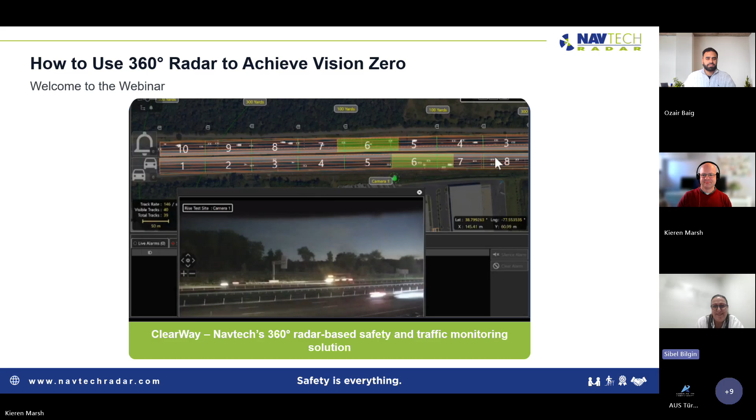Hello everyone, and welcome to a webinar about Navtech's 360-degree radar-based incident detection and traffic monitoring system. Talking to you today is myself, Ozair Baig. I'm a sales engineer at Navtech, responsible for all ITS-related business in Turkey. And with me I have Kieren Marsh, who is Navtech's ITS product manager, who also brings a rich history of technical delivery experience with him, and who will guide you through some of the technical fundamentals of the system.

We hope you will then leave this webinar today with a better understanding of what makes ClearWay a high-performing and versatile system. A bit of background for context about Navtech.

Navtech have been in business since 1999, so for around 25 years. This has allowed us to build our product expertise and experience when it comes to deploying and designing radar safety systems. We have our own purpose-built manufacturing site, enabling us to keep all developmental and design aspects of our system in-house. We were a founder-led family business for 20 years, and at the end of 2018, we joined with Halma, who are a large UK PLC listed on the UK stock market. Halma is a group of engineering companies that work to provide cleaner, healthier, and safer work environments, and Navtech are part of their safety division, contributing to this mission through our advanced radar safety technology.

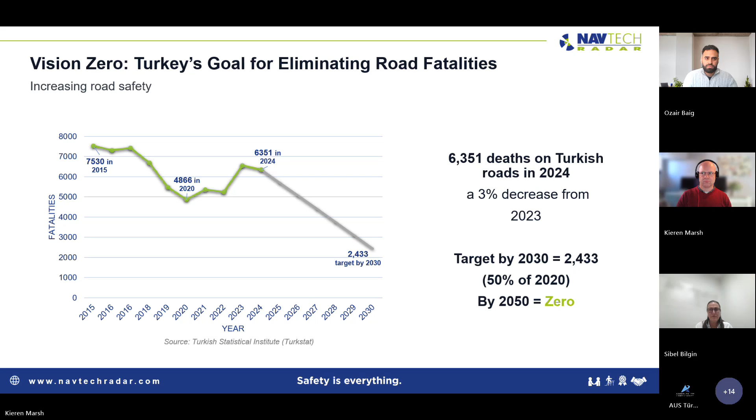Navtech's ITS solution ClearWay combines 360-degree radar technology with advanced rules-based software to deliver powerful and precise monitoring and detection capabilities. It is used by highway agencies, departments of transport, tunnel operators, toll and concession owners to operate their roads, tunnels, and bridges more safely and efficiently.

The 360-degree radar-based AID system detects incidents within seconds, enabling operators to respond swiftly, keeping traffic flowing whilst enhancing safety. It detects along long stretches of highways in poor visibility and adverse weather conditions, improving safety when it's needed most, in conditions where accidents are more likely to happen.

When you need your detection system the most is often when conditions are far from perfect. It may even be that the conditions had a part to play in any incident itself.

Navtech radars will continue to detect with the same level of performance in fog, snow, rain, smoke, complete darkness, and in bright light and glare. In these situations, being able to reliably detect becomes even more critical to ensure other road users are alerted and diverted appropriately.

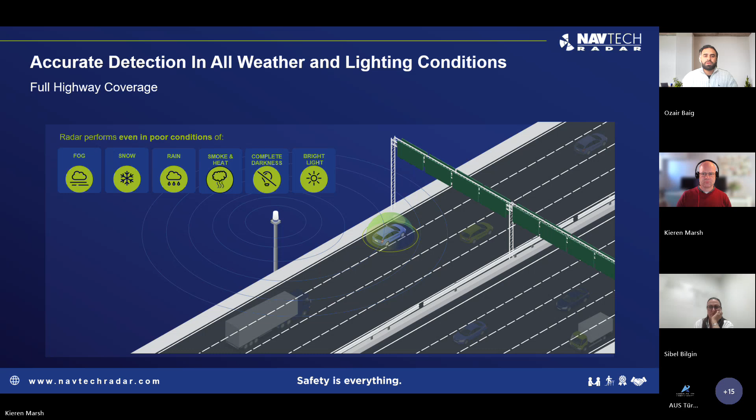Incident detection in tunnels can be challenging. ClearWay is a proven incident detection solution in tunnels across the world. The 360-degree radars monitor for incidents across your entire tunnel, including at portals and approaches. This is where vision-based technologies can struggle due to the high contrast lighting and variable weather conditions. Automatic camera control adds visual context to alerts, assisting operators to respond appropriately.

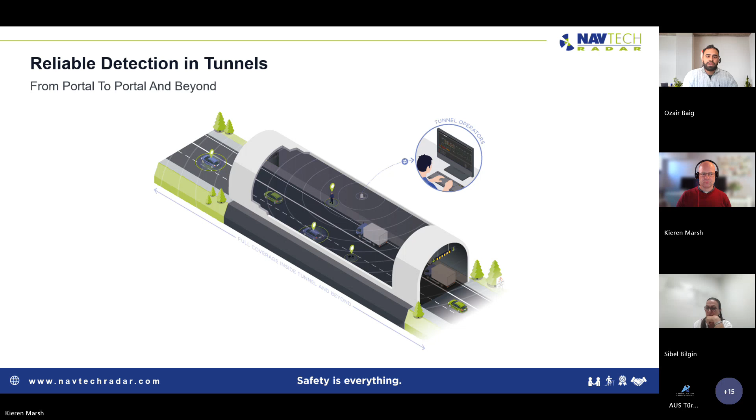ClearWay provides comprehensive safety features by being able to detect the most serious incidents. These are stopped vehicles, wrong way or ghost drivers, obstruction detection such as dropped loads or rockfall, hard shoulder monitoring, queue detection, vulnerable road users such as unauthorized pedestrians on the road, and wildlife detection to monitor for animals that may cause serious collisions. From the same radar instrument and software, traffic statistics for the monitored road space are available.

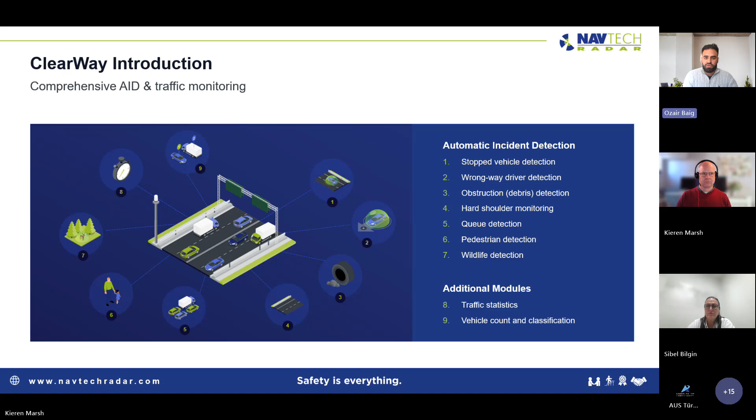Count and classification data is also available, again from the same radar and software components. So that's giving you a top-level view of ClearWay and how it boosts safety on mission-critical roads. Kieren is now going to delve into some more of the details, firstly by explaining how Navtech's 360-degree radar works.

Great, thank you, Ozair. Okay, so I'm going to start with a quick explanation of how radar works, and then we're going to get into the details of our 360-degree implementation.

Firstly, radar is an active sensor. In other words, it produces its own signal and processes the reflection from everything within the line of sight of the instrument. This contrasts with cameras that require natural or artificial light to illuminate the scene, which can, of course, vary significantly in differing environmental situations.

Time of flight of the radar signal is used to accurately determine the distance of an object from the radar. The time a signal takes to be reflected can be used to accurately determine how far away the reflecting object is. The static radar beam is shaped to cover as much of the road space as possible within its view.

For our CTS model, the main beam is approximately 1.8 degrees wide and 1.8 degrees high, with a special dish to fill in the space closest to the radar. On its own, this covers the entire road space within view from around 6 meters of the radar all the way out to its instrumented range of 500 meters.

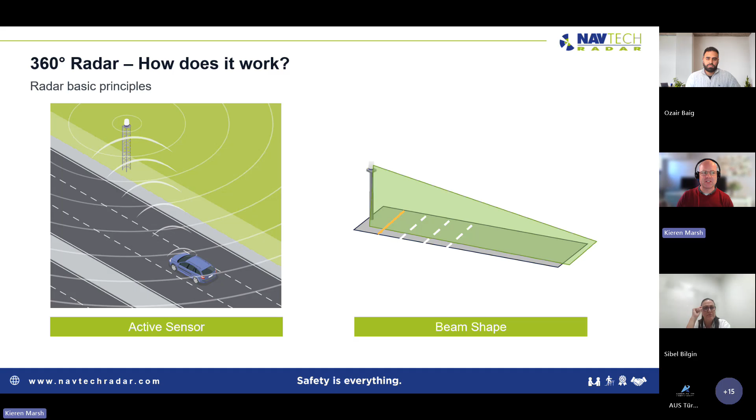As you'll see next, adding a rotating element to the beam gives this method of detection a distinct advantage. The dish inside the radar rotates at 4 Hertz, so that's 4 times per second, and the beam samples the environment 400 times per revolution.

Each beam sample is broken down into approximately 2,800 pixels of 17.5 centimeters, giving a resolution of around 1.2 million pixels per revolution of the dish.

This is the fundamental and unique operation of our radar and allows us to have a full 360-degree field of view. From the image on the slide, a single radar can monitor 500 meters of road space over multiple lanes and carriageways with a high detection accuracy.

Consecutive scans are compared to look for moving objects. Consecutive scans are also assessed for any changes in the static background. This is a method used to detect any new stationary objects, such as stopped vehicles or other obstructions. Static objects not of interest, such as signs, posts, and gantries, are essentially ignored by the radar due to their long-term presence in the radar imagery.

Once moving or stationary objects are seen for around 4 scans, so that's about 1 second, the radar can begin tracking. Tracking is what I'll talk to you now in the next slide, which is the fundamental feature of the radar output.

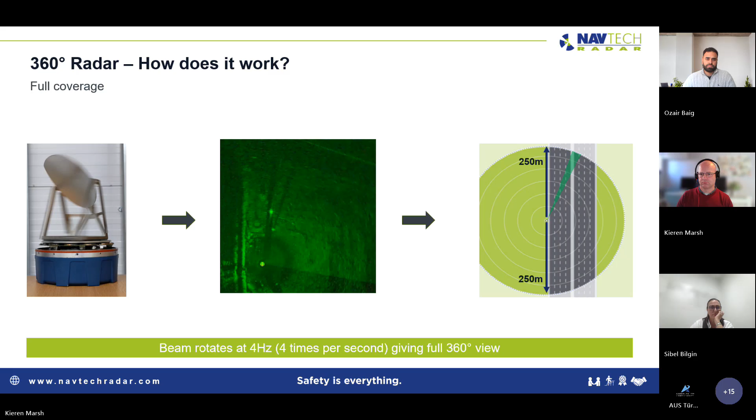As the radar scans, it tracks all moving and static objects by ignoring already present background objects and only focusing on what has changed. Each object is sighted on each rotation, so that's four times every second, and each set of sightings makes up a track for that object.

Each radar tracks all objects of interest within its field of view. The properties of these tracks are then assessed in real time by the back-end software against a set of predefined rules. All rules are specifically configured for the project's required applications, such as stop vehicle, wrong-way driving, pedestrians, etc. If any tracks exceed any of these predefined rules, then alarms will be raised.

Tracks can also be counted, providing traffic statistics for the entire length of the road or providing count and classification data at specific points on the highway.

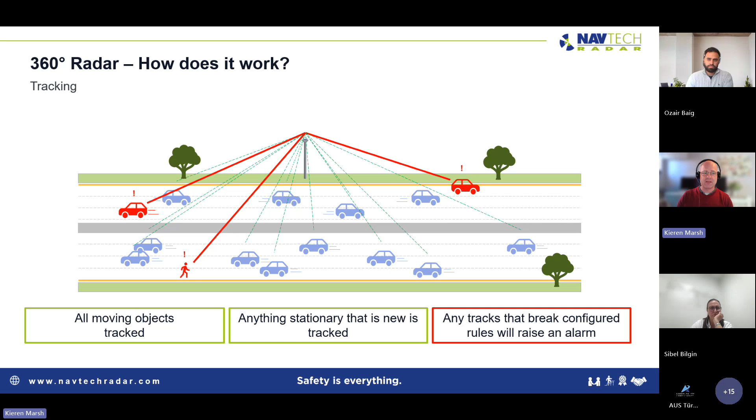Tracking and our ability to continuously follow vehicles, pedestrians, or stationary objects over large areas sits at the heart of Clearway's effectiveness. And as we'll see shortly, combining this with the unique benefits of radar means Clearway becomes a powerful tool to enhance safety on roads and in tunnels.

Here's a short example of a video demonstrating tracking in action. At the top of the frame, the green circle denotes where the radar and dome camera are co-located. Tracks displayed on the carriageway represent the track information being processed by the radar. At the bottom of the image is camera footage of the same section of road for context. This tracking of every vehicle is the primary function of the radar and underpins the ability to provide full coverage of long stretches of road.

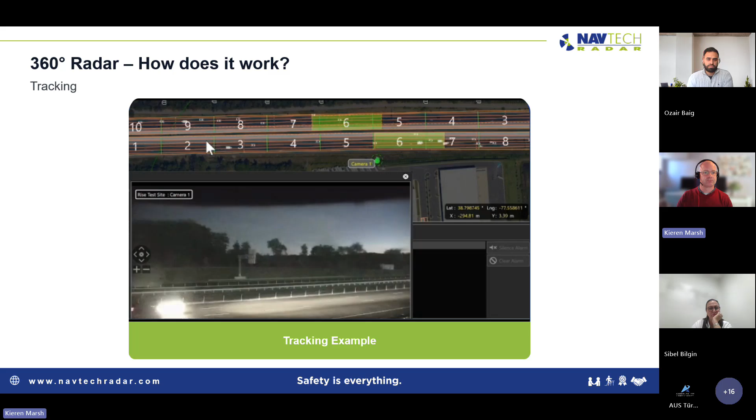Building on what we've learned about tracking, I'm going to give you an overview of Clearway functionality as a combination of radar and software. I'll also touch on system performance metrics, specifically time to detect and response times, which is critical from a safety aspect. We'll also look at the kinds of third-party integrations available to connect outputs from Clearway to systems that you may already be using.

A single radar can reliably and accurately monitor up to 300 meters of road in a tunnel and 500 meters on an open highway. Radars deployed in series can therefore provide unbroken coverage for many kilometers of road. Radars can be mounted at the side of the road or in the median and are mounted between 4 to 5 meters above the road surface.

The radar is a long-range instrument and must have line of sight of all areas it is expected to detect. So to get the maximum range for each radar, there are several aspects that must be considered. For example, to give a radar the best view around a bend, we tend to mount on the outside of the bend, as depicted on the infographic on screen. This maximizes the range the radar can see, ultimately reducing the total number of radars required on your system. Elevation changes, bridges, and other potential aspects that may affect range also all need to be considered.

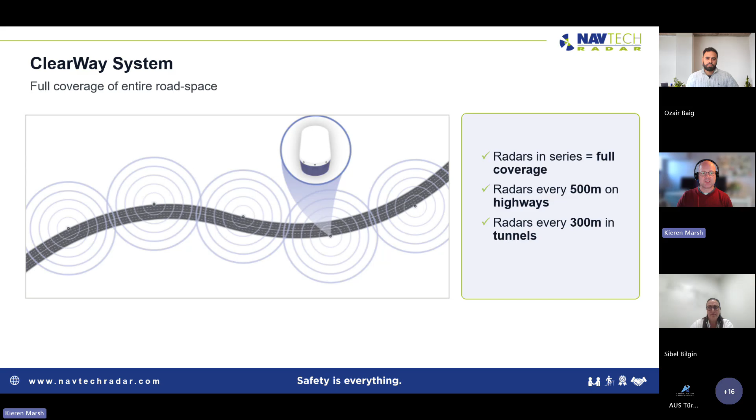On that note, Clearway is designed to be a multi-device system, with each device serving track data for multiple applications. All radars are assigned to a single back-end software instance that monitors and counts each track from every connected radar. Clearway software processes the track data in real time, assessing each track every quarter of a second from all radars against predefined rules and appending them to traffic data statistics.

The same software instance acts as the central point for all third-party connections for both alarm and traffic data. Our biggest system to date runs over 100 radars, with each connection to third-party systems coming from a single point within Clearway.

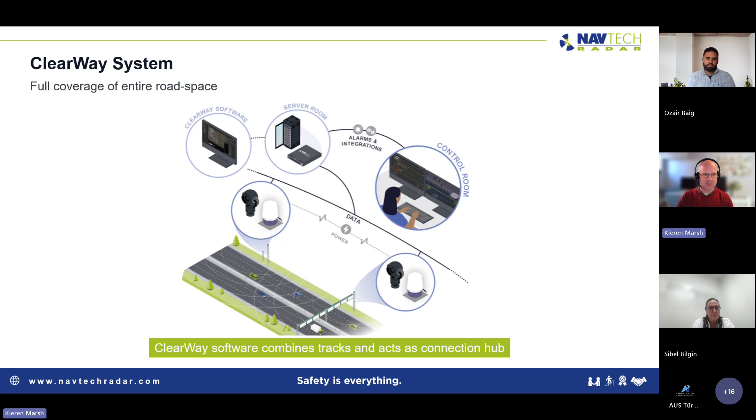The speed at which an incident is detected and visually verified is critical to minimize any escalation and ensure appropriate action is taken. The radar will begin tracking a new situation within 1 second and can have a fully qualified track within 5 seconds. So if a person enters the monitored road space or a vehicle stops, the radars will immediately begin to track. By 5 seconds, the radar will have seen the object enough times to have a solid assessment of the track to ensure reliable detection.

Reliability of detection is paramount in any AID system. This ensures that alarms raised are genuine and false alarms are minimized. Alarms can be raised by Clearway within 10 seconds of an incident occurring. Directing cameras then only takes a few seconds, and the incident response can begin within 30 seconds.

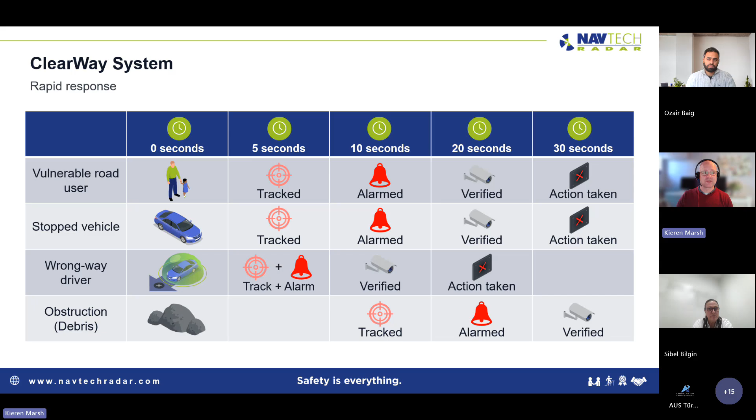Clearway is a versatile tool in the way that it integrates with third-party systems. Data integrations allow connections to third-party traffic management systems, SCADA systems, or PLC logic layers. PTZ cameras can be directly controlled, and there'll be more about this in some following slides. Video management systems can be directly integrated with, and I'll talk more about this as well in following slides. Dry contact relays can also be triggered to toggle on or off connected devices.

Specifically looking at data outputs, out of the box, Clearway comes with 3 main data integration methods that are used to send alarm, health, and traffic data to third-party traffic management systems, your SCADA systems, or your logic layers. This data can be fed directly into alarm dashboards in control rooms, leading to the rapid response times mentioned previously.

Alarm data can also be fed into control systems where that information can be used to drive third-party logic decisions. For example, initiating tunnel closure signs and barriers when a wrong-way driver is detected, or feeding into variable message sign activation to warn drivers of a potential incident ahead.

Health information is continuously fed from all major components of the system. Connection and power issues with any roadside radars will raise alarms, as will software component errors, all of which can be received by operational monitoring tools to ensure easy diagnosis and minimal fault response times.

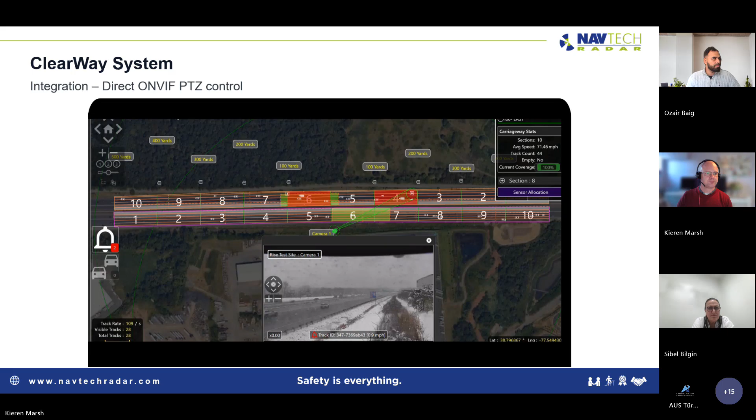The next powerful layer is the ability to integrate with video management systems. We've already seen the power of Clearway to fuse the power of radar detection with the visual context of camera control. This functionality can now be added to video management systems to integrate with existing alarm management features and to ensure an easy to access record exists of a detected incident.

The video on the screen shows a pedestrian being detected on the road by the radar system. Clearway then instructs the camera to point and to follow the target while they're in the road space.

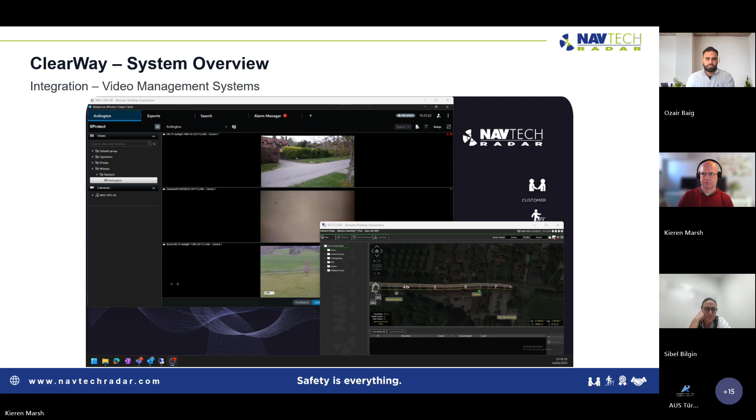So now we've seen the power of Clearway system, we're going to move on to the benefits of radar. What makes a 360-degree radar system beneficial, and how can using radar make your roads safer?

Firstly, some words on the benefits on open highways. Radar is not affected by variations of natural or artificial lighting, so it doesn't matter if it's too dark, too bright, low sun angle, or dazzling headlights. Radar is also not affected by weather precipitation particles in the air. Many of these situations are when you need your AID system to be at its most effective, and is one of the main reasons to choose a radar system for detection.

As we've seen in previous slides, full coverage can be achieved with radar spaced up to 500 meters apart along the road, remembering you get multiple capabilities from the same device. This results in a clear benefit on open highways by requiring low infrastructure footprint as a result of its long range.

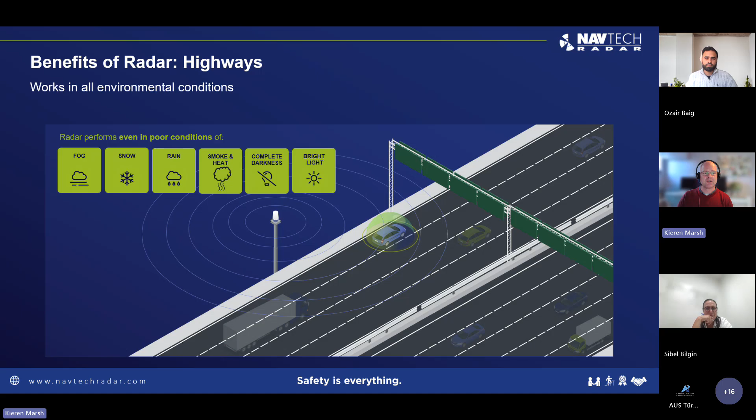In tunnels, research statistics show that the highest collision rates are at the tunnel portals and tunnel approaches, and less so in the interior zones of the tunnels. The portal and approaches are defined as areas within 150 meters of the tunnel entrance.

This is where light-based monitoring technology often struggles with variable lighting and weather. Radar is unaffected in these conditions and maintains full detection capability.

Smoke in tunnels is also a major concern when the unthinkable happens. Do you have a system that is able to continue to detect people and cars in a smoke-filled tunnel? In the unlikely event that this should occur, it could prove to be crucial.

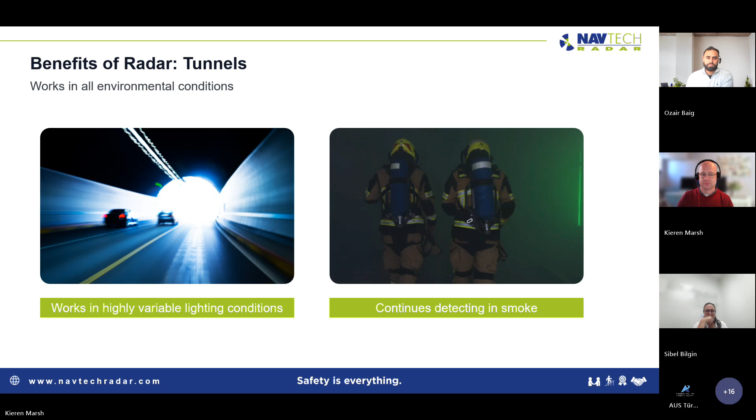So Navtech upgraded our original belt drive motors a few years ago, and we've since replaced them with a new direct drive motor system. Our new motors don't require any servicing during their 10-year life cycle, meaning no roadside maintenance is required for the lifetime of the device.

Highways and tunnels can be harsh environments for any ITS equipment. Dirt, dust, and soot soon coats anything left exposed. The sealed IP67 radar enclosure ensures the internals remain uncontaminated, even in the harshest road environments.

The slide shows an older V2 CTS 350 in the center picture. This radar is still operational in a UK tunnel and has been in use for nearly 10 years. Here you can see this unit has not been cleaned for some time, if at all, yet still maintains its full capability. No roadside maintenance means fewer roadside visits by maintenance crews, keeping them out of harm's way.

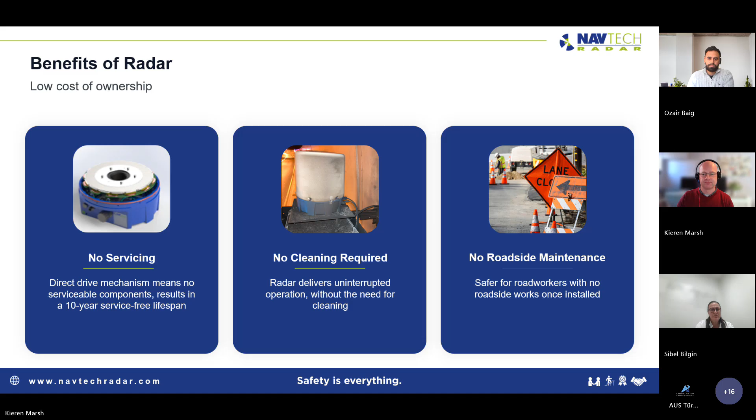During system design, existing infrastructure such as gantries, ITS posts, and variable message signposts can be used to mount radars. This means existing power and network connections can be used, saving the additional cost of running new fiber and connecting new power terminals and network switches.

For tunnels, radars can be placed in locations that better suit connectivity. Brackets are usually attached by inserting 4 studs into the tunnel wall at the design location. Once the prefabricated bracket is attached, the radars are simple to install. 4 bolts attach the unit to the bracket, and then 2 simple connections for power and network.

PoE, Power over Ethernet versions of our CTS radars are also available, meaning existing PoE infrastructure can be utilized.

Each radar requires leveling to the angle of the road. This process usually takes around 1 to 2 hours for each radar. During this time, the engineer will adjust the leveling plate on the bracket to ensure optimal performance in all directions, remembering this is a 360-degree device. The engineer will also run a series of on-road tests and gather data to ensure accurate records are kept of the performance of the radar at the time it was installed.

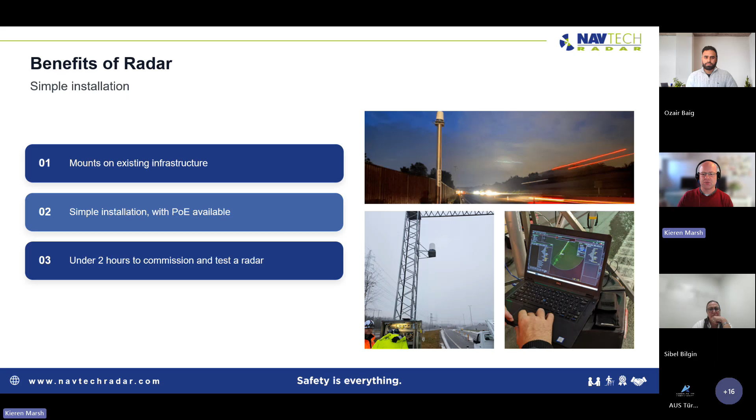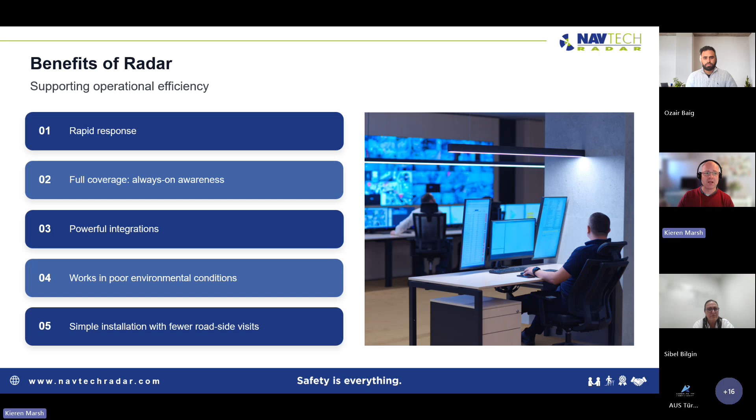With a 360-degree radar system, operations rooms now have an eyes-on system monitoring their entire critical road space. Operators can quickly assess their priorities and focus on incidents that require their highest attention. They then spend less time relying on scheduled camera scans, knowing that the radar system is monitoring the road on their behalf. Combine this with the ability to continue detecting in poor environmental conditions and requiring fewer road visits, all stacks up to making roads safer for road users and maintenance crews alike.

So there is your overview of 360-degree radar. We have touched on Clearway's powerful integrations, on Clearway's safety and efficiency features that all come as a result of full coverage and minimal roadside interventions.

I'm going to hand you back to Ozair now, who's going to talk about some real-world use cases of Clearway to demonstrate where Clearway continues to make a difference to road safety and efficiency.

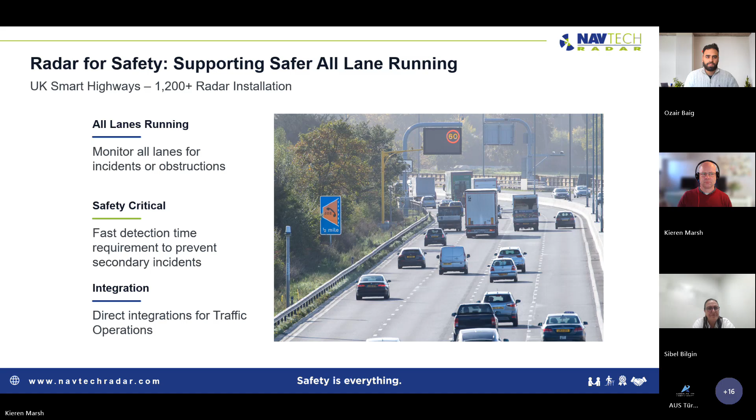For roads that require full coverage to monitor for incidents and to count and classify traffic to feed into concession key performance figures, Clearway is also a proven solution. Clearway is being used to monitor 27 kilometres of highway and 15 connecting ramps on Transmission Gully in northern Wellington, New Zealand. Here, full AID functionality is provided to ensure incidents are dealt with quickly and within required response times. Count and classification data is fed to the road authority, where it is used to demonstrate traffic flows and ramp performance, which are all within set key performance figures.

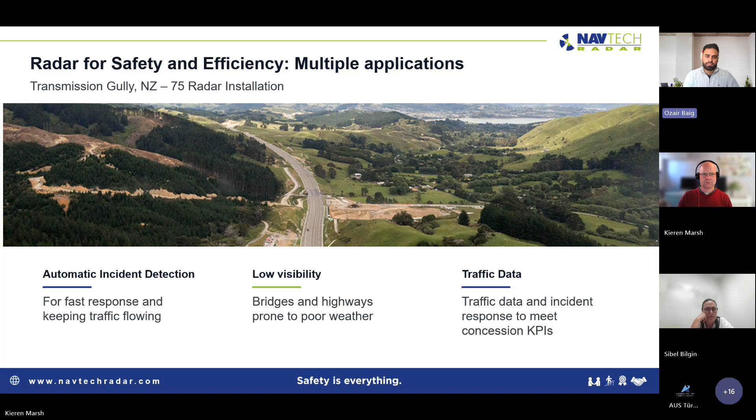In road tunnels, Navtech Clearway delivers an always-on level of awareness that provides full detection inside the tunnel, at the portal, and beyond into the approaches. Navtech's benefit of not being affected by tunnel portal lighting conditions means incidents that happen in or around the portal are detected with the same performance as any other part of the tunnel. Clearway is trusted to be installed in over 15 tunnels in Norway, ranging from 300 meters to 15 kilometers in length, where it's used in some tunnels to automatically trigger tunnel closure systems in the event of a wrong-way driver.

Clearway's ability to control PTZ cameras and bookmark video management system recordings adds another layer of confidence to a situation where rapid response may be critical. If the worst should happen and the tunnel becomes filled with smoke, Navtech's 360-degree radar still provides full detection capability when you need it most.

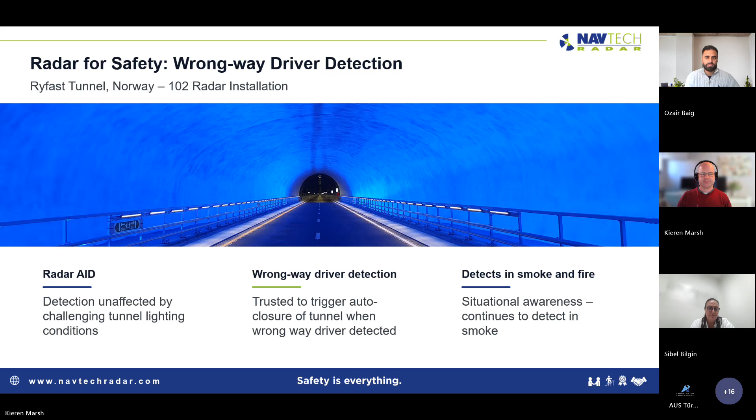And the Stockholm Bypass project - it's one of the biggest infrastructure projects in Europe. Yunex Traffic were chosen as the ITS provider, and Navtech was selected to provide our 360-degree radar technology to monitor sections of the open highway and to provide reliable detection at the tunnel portals. This is to ensure reliable detection is achieved in the variable lighting zones entering and exiting the tunnels.

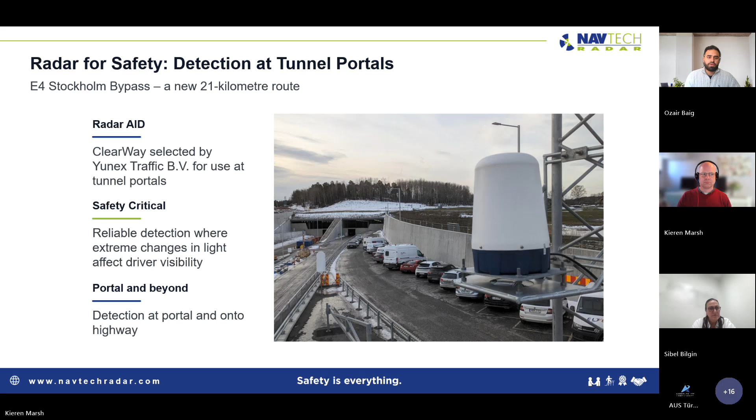Finally, to finish on more roads in Stockholm, almost 92 radars are in operation on some of Stockholm's busiest roads that now include the E4, the E18 and the E20. Stockholm was in fact the first ITS installation for Navtech almost 15 years ago, and many of the major routes in and around Stockholm suffer from heavy congestion, and any incidents could bring many kilometers of traffic to a standstill.

Our ClearWay installation has steadily grown over the years and even includes the 2-kilometer Törnskog tunnel in the northern suburbs of Stockholm. This system continues to be in service to this date and is supported by our in-house service delivery team.

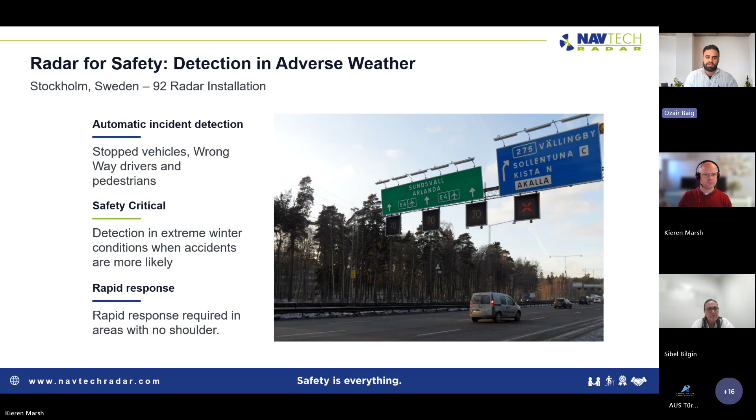So now you've seen the real-world benefits Navtech's 360-degree radar system can bring and the scale of the systems Navtech are trusted to deliver. I'm now going to share our performance guarantee and outline Navtech's ongoing support services available for the lifetime of your system.

So all systems designed by Navtech come with our performance guarantee. If we design a system to an agreed specification, we will guarantee we will deliver the system to meet that specification. Specified metrics can include detection rates, false alarm rates, and time to detect rates.

At Navtech, we don't just build our radars and design our software. We also deliver fully functional systems with our highly experienced in-house engineers. We can work anywhere in the world to ensure that you get the maximum expertise when delivering your system. We can commission and test radar systems at the roadside and can even support operators in the traffic management centers.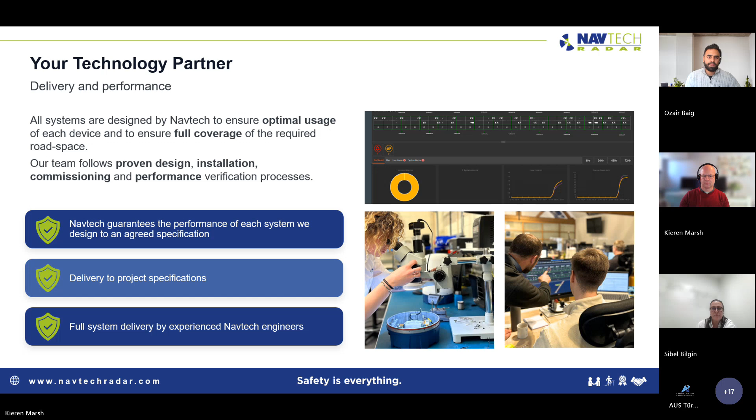Beyond successful delivery, we will continue to support your Clearway installation for the lifetime of the system. Our ITIL4 service management desk can provide first, second and third line support with 24/7 access available if required.